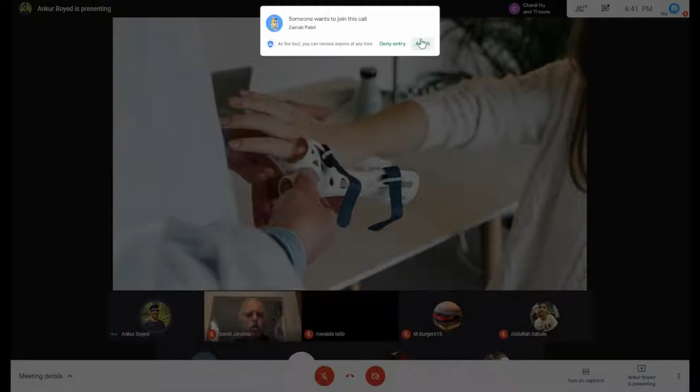However, these manufacturers only look for money, so they don't like to take risks with ideas that are new and innovative. This means that if you have a world-changing idea and a plan on how to make it, you're very unlikely to have it spread throughout the world. However, in the past couple of years, there have been many inventions and creations that bring privileges to the makers of this world, people like you.

Of these inventions, one of the biggest ones is 3D printing. It gives you the power to create pretty much almost any idea you have in your mind. To put it simply, a 3D printer works by melting plastic and creating a bunch of 2D layers that stack on top of each other to create a 3D object. Think about it as stacking differently shaped pieces of paper together.

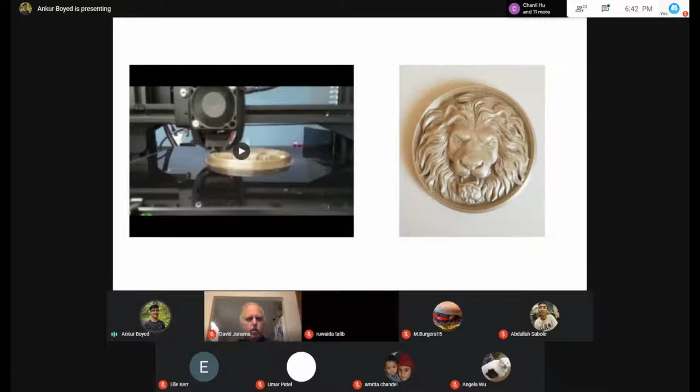For example, here is a lion emblem being 3D printed. Think about it as stacking differently shaped pieces of paper together. So this may seem really simple, but just think about it.

With a 3D printer, you can create pretty much any object you can think of, including desk organizers, headphone stands, miniatures, Christmas ornaments, or even drones. All of these things can be created without any interaction on your part. You just press a couple of buttons and the printer does the rest.

However, there is one really important skill you need to learn in order to do this, called computer-aided design, or CAD, which you'll be starting to learn today on a program called TinkerCAD. CAD allows you to create highly detailed parts on a computer, which allows it to be exactly replicated over and over again on different computers.

This means that someone on the other half of the world can take your design, print it, and get the same results as you did. This ability to give the same instructions each time is what makes 3D printing so useful.

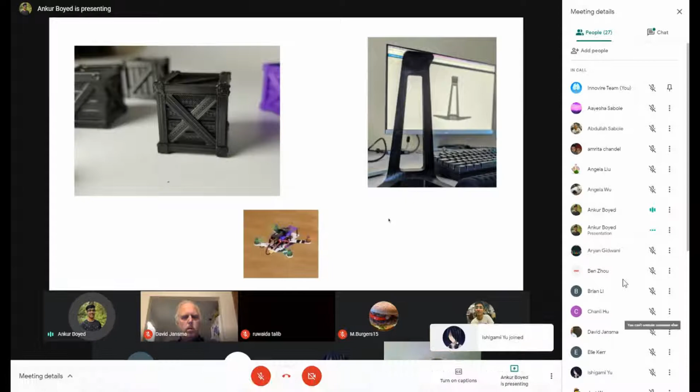If you've joined the Christmas CAD competition, you've been given the opportunity to 3D print your design for free. This is a really good opportunity to get into the field of 3D printing and learn how to create anything you want and go from an idea to a part that you can hold in your hands.

Now the question is, how can this technology solve the problem of mass manufacturing? Well, if you really do have a good idea for a device or product, you can start producing it using a 3D printer. If you want to perfect your idea, you can produce it using a 3D printer. Companies all around the world use farms, or many 3D printers, to create their products.

There are so many applications to this really cool technology, and we hope this small workshop can help you get into it. Thank you.

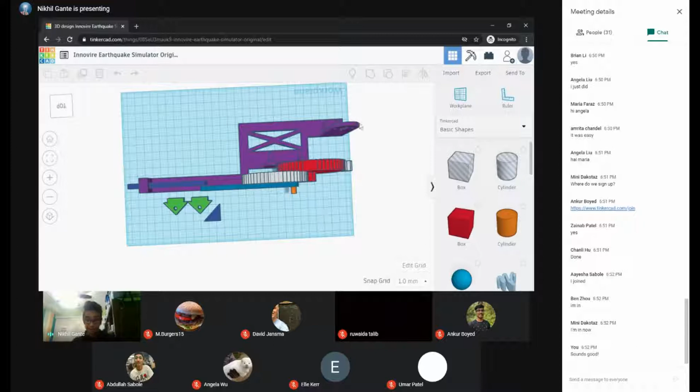So I don't have the tricopter on hand, but I do have some other projects. This is something I worked on last year. If you don't know, Innovire hosts conferences in addition to just classes. We were going to host a conference this year, but then COVID hit, so that didn't really become a possibility. This is the Innovire earthquake simulator, a design that I made last year because at the time I couldn't access a Fusion license, they wouldn't respond to my emails.

I can see it. Yeah, a little picture. Yeah.

So this right here is, I think, an 8 to 56 gear. When you turn this gear, it starts spinning around. It's basically a rotary to linear converter, so when you start moving this, there's really no other position for this rod to move other than back and forth.

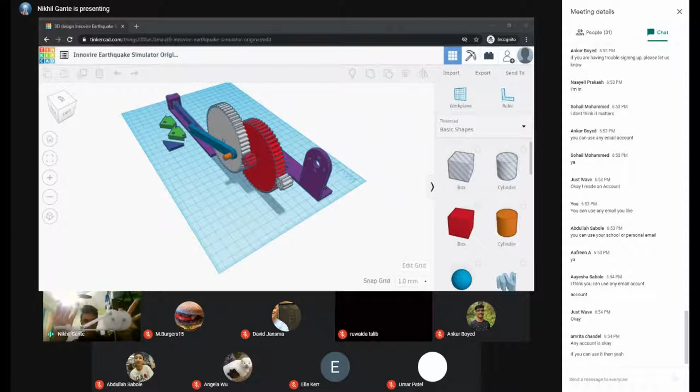So by moving this forward, the rod would start moving in and out. It's really hard to see on camera, at least I think it is, but when I start turning this it should start going in and out. I'll probably put my hand against it so there's some kind of background.

But this would start being activated in and out when I start spinning it, and this moving fast enough would shake a tower. So the goal of last year's challenge task was for kids to make a tower that would be placed on a platform, and this would be shaking that platform. Depending on how long the tower lasted, we would give a higher score.

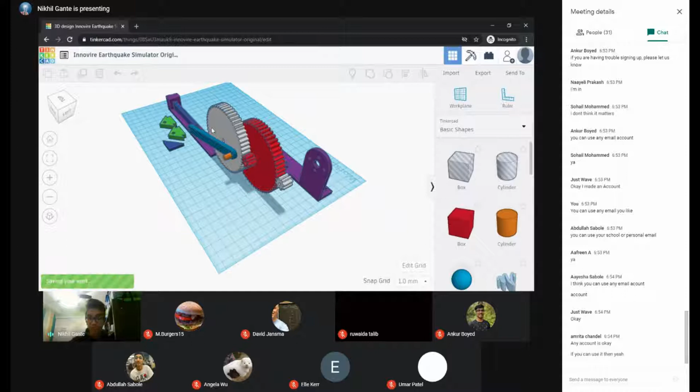Anyways, that's just one of the projects I've worked on in TinkerCAD. There's a ton more. I would just keep talking, but I don't want to waste your time. So if everybody has a TinkerCAD account, I can just get started.

You have one? Yeah, I'm just gonna start now. But you can see all the different projects I've made, and I'll go over some of them afterwards too if we have time.

So we can just go ahead and go to create a new design, and you have to be under 3D designs, because TinkerCAD also allows you to create circuits. Those are also pretty useful - I created a quick voltage divider last month. But you want to stay in 3D designs, that's what we'll be looking at today. So just click new design and we can get started.

So I'll just be teaching you some of the basic parts of working with TinkerCAD, and then we'll actually look at making a project together. So let's look at the controls first of all.

If you guys have a mouse, which I recommend for any CAD modeling software, you just need to hold down the right mouse button for activating the rotate function like this, and then you can look all around your design. Or if you're working on a trackpad, TinkerCAD supports that as well - you can just hit your right trackpad button. It's pretty easy. And if you hold down your scroll wheel on a mouse, you can pan in and out. The equivalent on a trackpad is holding down the shift key while right mouse clicking.

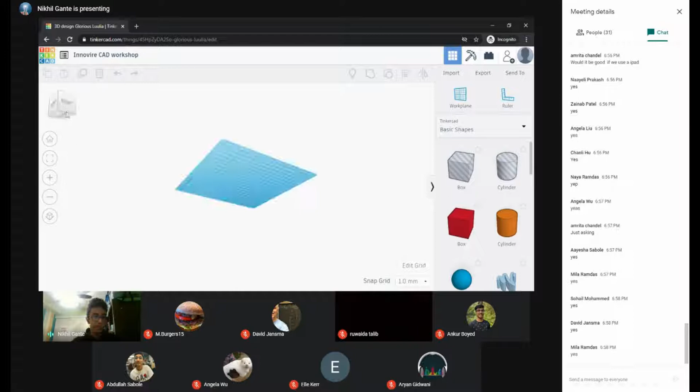You can also use the view cube to rotate around, though I don't prefer that since there's not much resolution compared to rotating with the right mouse button. I can click the front view to show exactly a front view, and I can click not only on the main faces but also on a corner or an edge.

Anyway, that's enough about how to work around the TinkerCAD workspace. Let's actually try to build something.

On the right side you'll notice a bunch of icons, and one of these is the TinkerCAD shape selector. This classifies which kind of shape you want to use. You have basic shapes like boxes, cylinders, and spheres, all of which you might have worked with in geometry in math class.

If you select a more complex array of shapes, you can go to text and numbers, connectors—these are also pretty cool—and there's also some circuit assemblies, I think. No, that's not it. I really want to show components. Yeah, that's the one.

If you've ever worked with Arduinos or any kind of microcontroller, you might have worked with servos as well. These are all part of the TinkerCAD workspace, so you can actually import them into the model and work with them. I think it's pretty neat that they have these already built in, because I know I would have loved access to these when working on a project.

For the most part, the shapes we're going to be looking at are in this basic shapes tab.

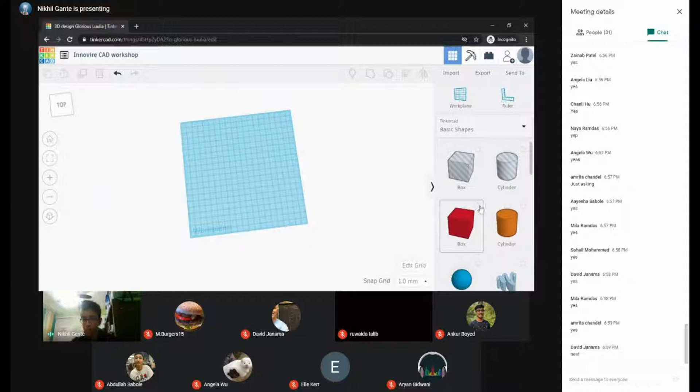You can actually select favorites for these shapes. I'm not sure if you can see the little star icon, but if I click on that, it becomes a favorite and I'll be able to access it more easily. So instead of going through shapes, I can go to favorites, and this is now a favorite—the box is inside my favorites.

I'm going to use this a lot, so I can drag the box shape right into TinkerCAD, like that. It's really as simple as that.

You can select all the different parameters you want here, including dimensions. For example, this is a 20 by 20 by 20 cube. I can make this 35, and just like that the cube expands outward. I can make this 10, and it will start shrinking. It's really easy to work with, as you notice.

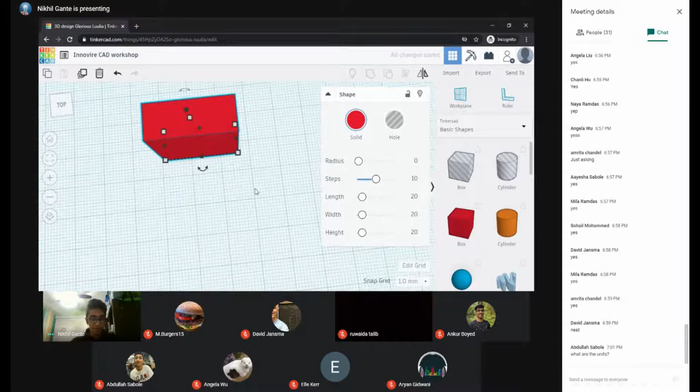I can also grab the little black box to expand it without having to type in a number. Now, a difference between TinkerCAD and a much more advanced parametric modeling software like Fusion, if I were to just show over here—

Wait, can you guys see tabs that are not my TinkerCAD? Oh, no, we can't. Okay, I should probably change that. Okay, I have to stop presenting.

Also, in the meantime, while you're waiting, Abdullah asked what are the units in regards to TinkerCAD. What do you mean—like measurement units? Yeah, I think that's what he meant. Okay.

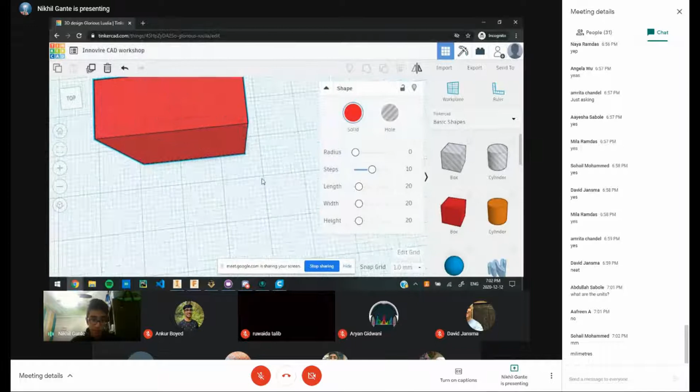The measurement units by default are millimeters. Let me get over to TinkerCAD. As you can see, if you look at the grid over here, that actually measures in millimeters squared. So that's 1 millimeter, 2 millimeters, and each of these larger squares are square centimeters. It's pretty neat that they make it easily accessible for you.

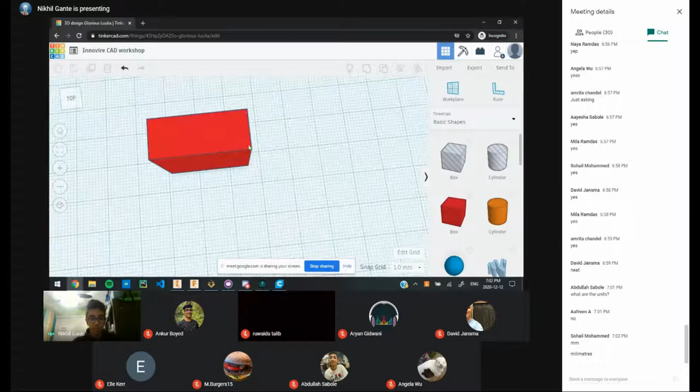But if I were to go into a parametric modeling environment like Fusion, it automatically allows me to set these dimensions and always shows them. If I switch back to TinkerCAD and look at a shape, I don't readily know its dimensions—I'd have to click on it and select to find out. You can't add dimensions to objects otherwise, so that is one downside. But again, this is simplistic, meant to get people into the hobby of 3D printing.

Some of the other shapes you can work with are also down here, and a useful feature is grouping shapes together. For example, I could take the cylinder and place it over here.

I can now group these two together. Right now they're separate objects, so if I start dragging this around, the red block is completely independent. But if I were to group them together, even if they're not attached physically, they'll become basically one entity, so now you can see they're both red to signify that. And now if I move them around, they both move together.

You can also degroup these shapes. You would press Control G to group stuff, or by pressing the icon. You press Control Shift G to degroup it. So if I do that, now these two are their own separate entities again.

Does the grouping concept make sense to everyone? It's not something that you see a lot in other softwares.

How do we do it again? Okay, how do we do what again? Like making the shape? Oh, grouping. Oh, grouping, okay.

So for grouping, you just need to select the shapes you want to be grouped, and that's signified by a rectangle with dotted lines. You can make sure you've selected the right shapes because there will be a little blue outline over them. And you just press Control G or the group button. Does that help?

More versatile than SketchUp. Yes, I agree.

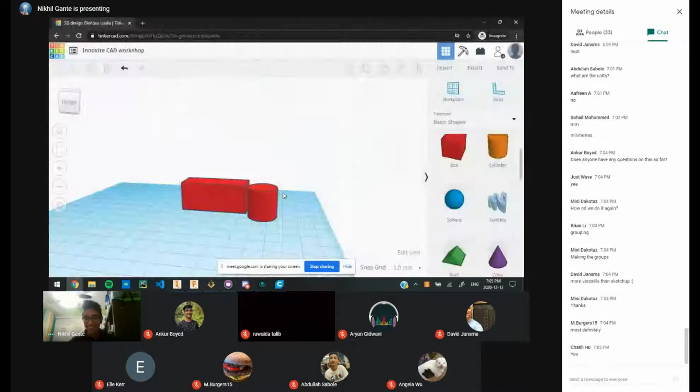So we can now move these together. We just made a positive shape, a positive group. Now these two are together, they're linked. But what if we want to make a negative space, like a hole?

Let's say we had to put a screw in. So if I were to make a screw, first I'm going to have to degroup these two objects, like so. And then I would make the dimensions for the screw hole. Let's say it's a 3mm screw, so I would just make it 3 by 3.

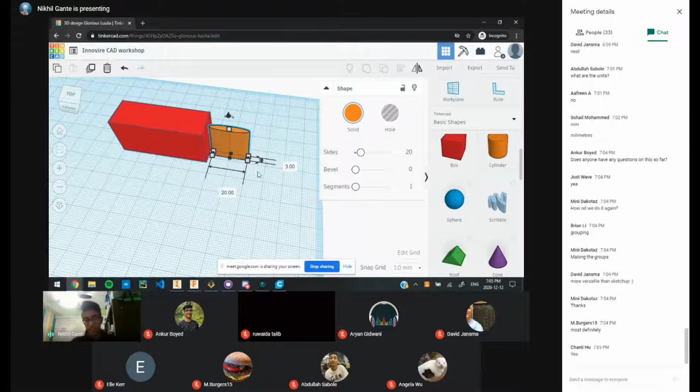Even though this says it's a cylinder, it allows me to make it like an elliptical object—I forgot the actual name for the 3D shape—but even though it says cylinder, I can squash it down and it becomes flat like that. And if I make it 3 for the other dimension, you get a cylinder again, but now with a smaller radius.

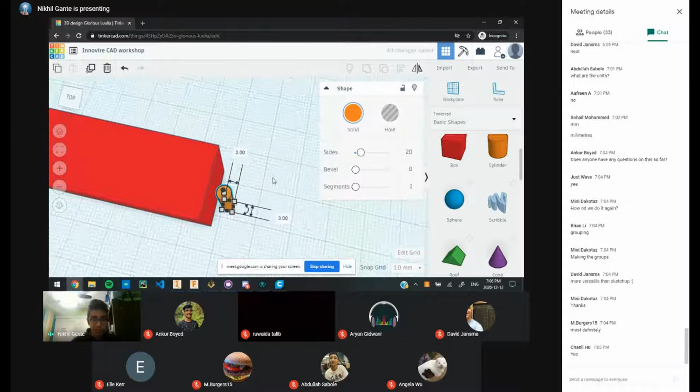You can see that these two are actually perfectly level, and I can confirm that because this is 20 millimeters, and this is also 20 millimeters. So if I place this right inside of the red box, you can sort of see the circle traced onto the red box.

So that cylinder you can click on, and then you can make this a hole. If you look over here, you see two different options: a solid object and a hole object. This is positive space, meaning these two get added together, and this is negative space, meaning this object is being subtracted from the larger one. I know I just said a bunch of words there—let me actually show you what that means.

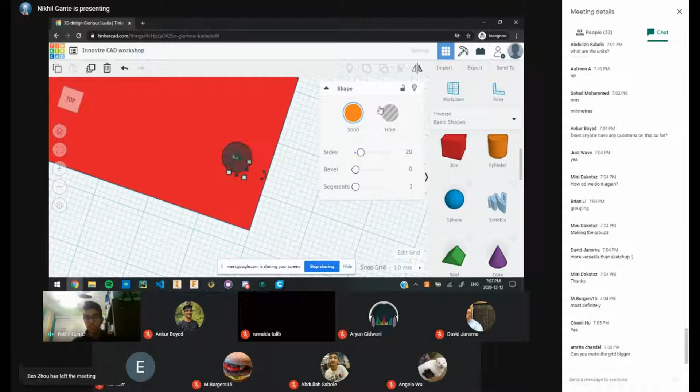If I press hole, you can see it becomes transparent. It's trying to simulate what it would look like if there was an empty cavity over there. To make sure these two will now actually become a hole, I need to select both of them, like I did before, and just press group. When you do that, you get a beautiful hole placed in the middle of it.

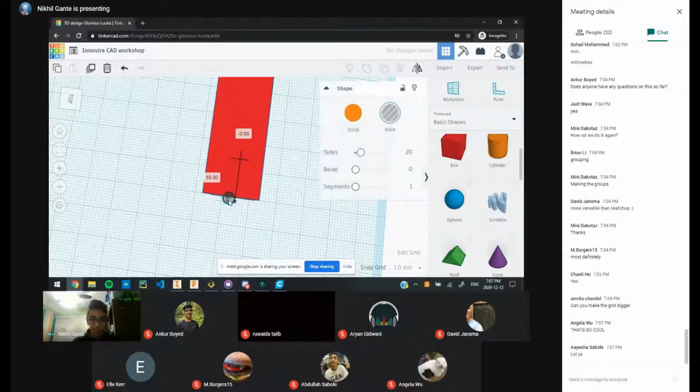Another difficult thing you have to deal with in more simplistic softwares is you can't actually tell if this is centered or not. This can be pretty annoying because there are two ways of moving these objects. The first way is to move it around with your mouse, but that's not extremely precise.

Instead what you would rather do is press the arrow keys. I want everybody at home to try pressing their arrow keys and moving it up and down, left and right. You can pretty much move these around however you like, and it allows a lot more precision than me manually trying to aim with my mouse.

Nikhil, go ahead. Sorry to interrupt, but someone in the chat asked, can you make the grid bigger? Can I or can he? Like, is it possible? How do you increase the size of the grid?

Oh okay, so you just need to go into edit grid, and then instead of the width and length being the default, which is 20 centimeters by 20 centimeters, you could make this, I don't know, 450 by 450. And it doesn't have to be square, obviously.

You can make it whatever dimensions you want.

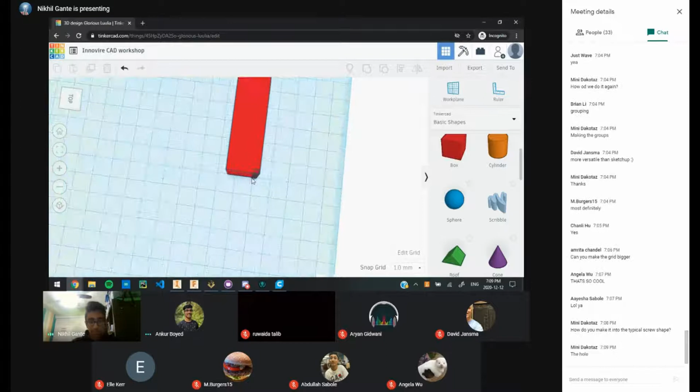Someone asked, how do you make it into the typical screw shape, like the cylindrical hole you just made? I think he's asking how you make that into the typical screw shape, like with threads. If you can unmute yourself and clarify your question, that would help, since talking through chat is fairly slow.

He said he's not able to talk. So, are you able to make a threaded screw or something through TinkerCAD? You can't do it directly, unfortunately. The only way I can think of is to import a helix and bind it around the cylinder, but that gets pretty complex. It's much better to import a design someone else has already made. I'm sure you could find something.

The great thing about TinkerCAD is that it's not just software for designing things. Unlike other software, and this is an advantage, you can actually search for other people's designs using the search icon. So if I wanted to look for a threaded screw, I can pretty easily try that. I didn't think I'd find anything, and yeah, nothing there.

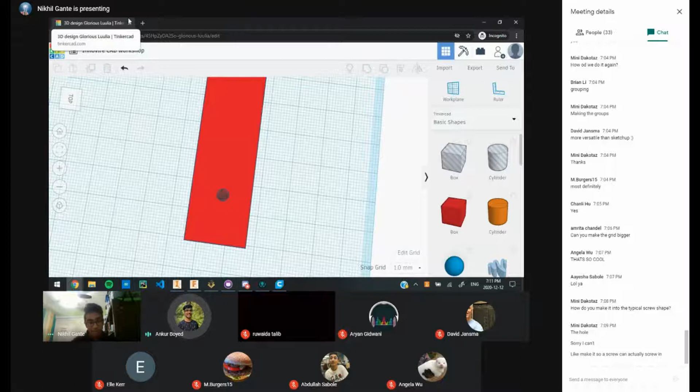Yeah, sure. Thingiverse is an online community with a bunch of 3D printed objects, but instead of being specific to TinkerCAD, it's across all CAD software. It gives you a 3D printable file, and by the way, these files are called STLs. So here we can see a bunch of designs on Thingiverse.

Actually, this is a YouTuber I watch, named Tom Stanton, and he made this air engine and put it up on Thingiverse. If you wanted to download his files, it's extremely easy - you just press download all files, and it downloads a zip file. Then you can import that into TinkerCAD. Let me show you that process, since it might be useful for you guys.

Do you want to do a thread, like how one of the students asked? Oh yeah, sure, I can do that.

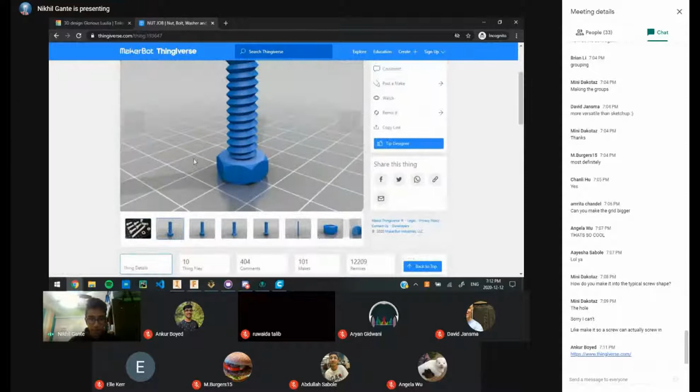So each of these files is a screw. It looks about right, so I just press download all files, and I need to unzip them. Okay, it's taking a while - I'll continue the lesson while that's opening up. Okay, that didn't take as long as I expected.

Okay, so you guys can see other windows, right? I changed the settings - yeah, we can see it now. Okay, cool. So this is in my downloads directory as the nutjob washer folder, and we can just go into the files folder, where each file there will be an STL.

So let's say I wanted to keep this one - I can easily do that. I just need to get that. So I'd go into the TinkerCAD file I'd be working in, and here you can see the import, export, and send to files icons. You just click on the import icon, and then you can either import an STL, OBJ, or SVG file.

OBJ is another format for 3D printable objects, but you won't end up using it often. SVGs are used for laser cutting - in fact, when Ankur and I made the tricopter a couple years ago, we used SVGs because we needed to laser cut files. If you don't know about laser cutting, it's a pretty cool thing, you should probably check that out.

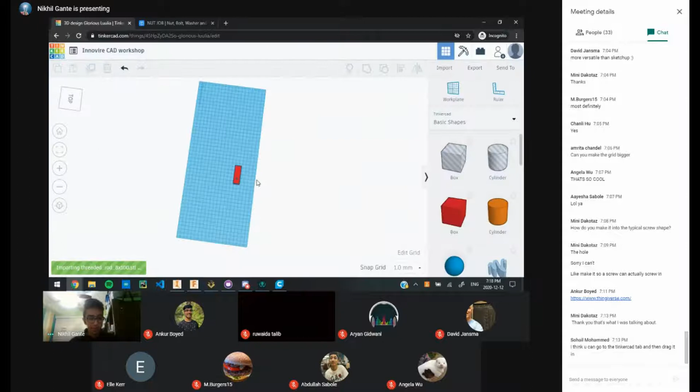And I can go into files, and let's say I want to go and grab... I forgot what it's called. Threaded rod, okay, yeah, this. And over here it gives me all kinds of dimensions: length, width, and height. And I can actually scale it up or down. So this will start off with the default measurements that the person made it with. If I want to make it twice as big, I just need to make it 200 instead of 100. Pretty self-explanatory, so I can import the STL in there.

Okay, so I just made a 200% size screw, and you can see the threaded rod in there. Can everybody see that? It is huge. Everybody can see that, right?

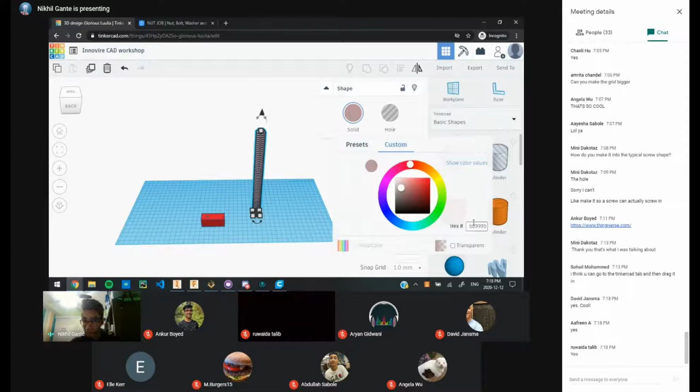Yep, okay cool, so I can change the color of this. Another cool feature, you just need to go into solid and select the color you want. And you can even make your own custom color by selecting the color wheel. All the stuff, if you guys just play around with TinkerCAD, I don't think you'll have much difficulty figuring it out on your own. It's not a particularly challenging software to work with. So let me make this green.

And if I want to actually thread into a shape like someone suggested earlier, it's not very difficult to do. All you need to do is make this a hole, which makes this negative space. Remember that. And now I can make this larger to accommodate the screw. And now when I select these two features, I can group them together, and there should be a thread right there. So unlike just a cylinder, there's actually a helix being drawn on the inside of this. So if I were to zoom in over there, you can see the spiral.

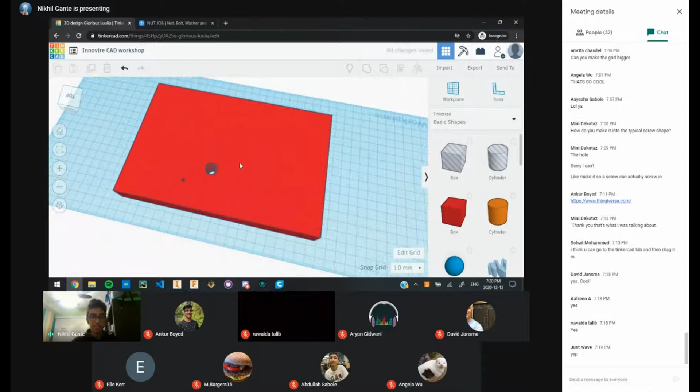Can everybody see how there's a spiral there? This is as far as I can zoom in, unfortunately. Nikhil, that'll print out with the spiral in it? Yeah, so with 3D printing, the resolution is only going to work so well. So if the thread is too small, which in this case I suspect it is, your 3D printer will probably have a pretty difficult time giving you those exact dimensions. It'll probably be like a much lower resolution version of this. So for making any threads, 3D printing I would not recommend using. You should probably use some other kind of machining, like if you guys know what a CNC machine is, that is much more precise than a 3D printer. So I would recommend using that for some kind of threading. But 3D printing is suitable for most kinds of shapes.

Another thing we have to talk about is also... Mr. Jansma, sorry for interrupting Nikhil, but I just want to answer your question. So when you're asking about threads, I do have a 3D printer at home, I have access to one, and I have been able to 3D print threads pretty successfully. But the thing is, like Nikhil said, there's only a certain amount of resolution. But what you can do is let's see if I can... Can you guys see me?

Yeah, we can see. Okay. Okay, cool. So let's see. Okay, yeah, wait one second. Okay, yeah, so you have this.

This is basically just like a wire organizer I 3D printed. I printed a thread here, and you can see that it works pretty well. This is an example of something that's really useful you can do with 3D printing—you can make custom threads and that kind of stuff.

But there are some constraints you need to think about. With TinkerCAD, there's a set resolution that you can export your file at. But if you're using a more complex design software, you can get a better resolution, and it's able to print really well.

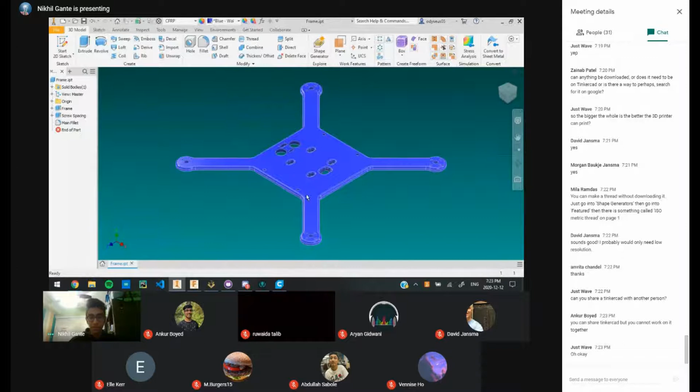Here's what the original file looked like—this is the quadcopter frame in Autodesk Inventor. Because I exported it as an STL, I could import it in here. So if I went to the first page, I don't have it here at the moment, I left it right here. As you can see, when I imported it in TinkerCAD, I was able to do so successfully, but it does really take away from the resolution.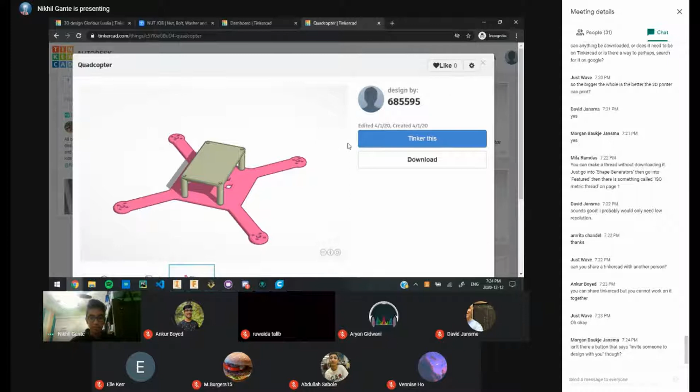You can see the edges are pretty roughed up, and you will lose some resolution in the 3D printing process itself. So when you design something, you can't always expect that when you actually make it, it'll be 100% the same in real life—that's something you have to account for when you design a part. For example, whenever I make a hole, I always design it with a quarter millimeter larger diameter than I actually want, just so that when I start fitting things in, it doesn't cause a lot of internal friction. That's just one example I can think of.

Sorry for rambling again. What was the other question? I forgot.

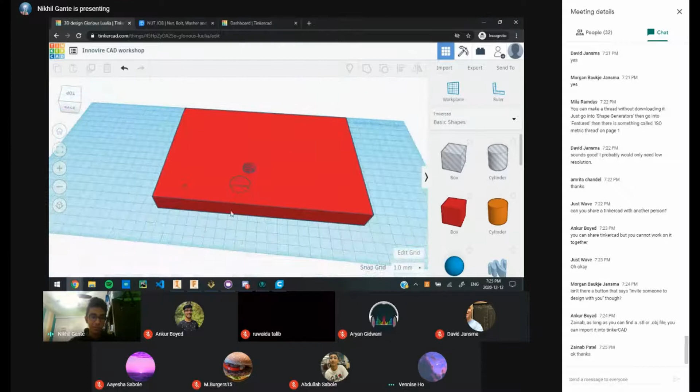I don't know if you covered this already, but another person was asking if the bigger the hole, is it better for the 3D printer to print? Not necessarily—unless you have an extremely small hole that you need to print out, like under 0.5 millimeters, I wouldn't assume it has any trouble.

But again, ask Ankur for more about that. He actually has a 3D printer.

Sorry, he or she asked how small, or can you print holes? I remember she said the larger you make the hole, is it easier to print? That's the case to a certain extent. If the hole is less than 2 millimeters, it'll have a harder time printing. But after that, it doesn't really matter that much. You can go pretty much as large as you want, and it'll still be fine.

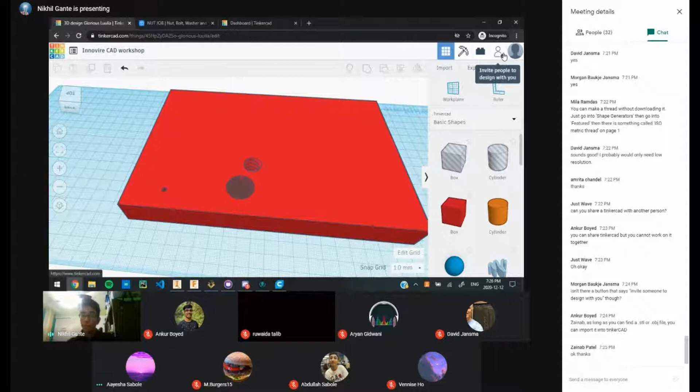The current last question is whether or not you can invite someone to design with you, or if there's a button to do that. When I checked last, there wasn't, but they've now added that feature. You can click on this icon and generate a link to share with the person you want to design with. Let's try a little experiment.

I copied over the link. I want to see if you guys can actually pop in and design with me. For the sake of not killing my computer, could it only be the execs who join in from Innovire? I don't want too many people joining in. Just tell me if you're able to.

I am joining, one second. Okay cool, I'm moving stuff. Can you see it? Guys, can you see that? I'm not touching a single button. He's able to collaborate. It is slightly laggy, but you can collaborate is the short answer.

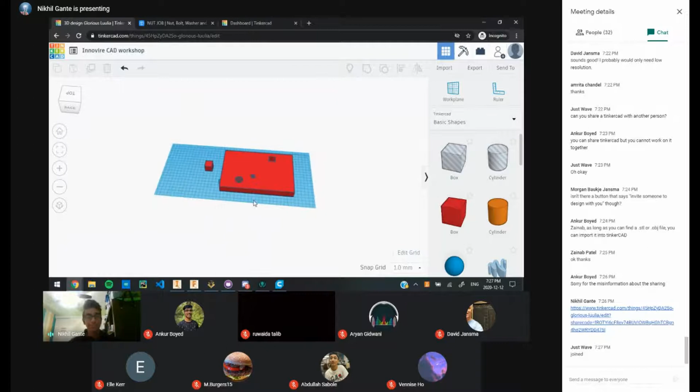Does everything I've said so far make sense to you guys, or am I just rambling? The chat says yes. Yes as in I'm rambling, or yes as in I make sense? Yes, as in it makes sense, I think.

There is a question: how do you know how many people are online with you? I think that's regarding the sharing. If I'm being fully honest, when I used TinkerCAD last, this feature wasn't there. When I just checked it now, it does not tell you how many other people are there. You'd expect that, as with Google Docs, the icon of the person joining would appear. But there was no way I could tell Ankur was editing mine until he started moving things around, like he is right now. It's unfortunate, but you can collaborate on the same design, you just won't know who is collaborating, if they're collaborating, and if so, how many people there are. But it is there, to answer your question.

Is that all the questions? Am I up to date, or am I still missing a few? You are up to date.

Okay, amazing. So we've discussed a couple of things. We've discussed how to bring basic shapes into TinkerCAD, how to combine shapes using the group function, and then how to actually subtract from those shapes with a hole or negative space.

Now let's actually try applying that into a project. The thing I want to create, I want to make a cool project. I've never actually made this before, so this is complete improv. I'm going to search for a batarang, and let's look for the design, and try to design a batarang.

I think that'd be a pretty cool project, and if you guys want, you can download this file afterwards too. I'm sure someone else has designed this on TinkerCAD before, so I could just copy theirs, but I actually want to show you everything we've worked with and see it applied in a project. I think that would be much more interesting to you guys.

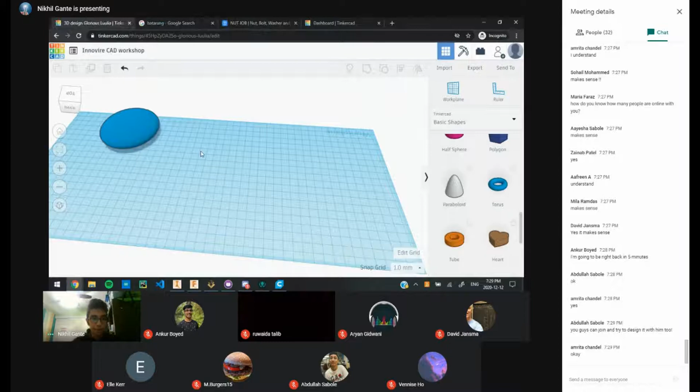For now, I'm going to assume that this batarang needs to be fairly thin, so let's say 2 millimeters. 2 millimeters for hardened steel is going to be extremely rigid, there's probably going to be no flex. So that's the reason we can make it so thin.

Okay, I'm going to start off by getting the main shape I want over here. It's been a while since I've thought the way I need to think in TinkerCAD, because the process is very different from other CAD software. First I need to make a cube that's going to represent what the bat is going to look like, and then I need to subtract from that shape in order to get a batarang.

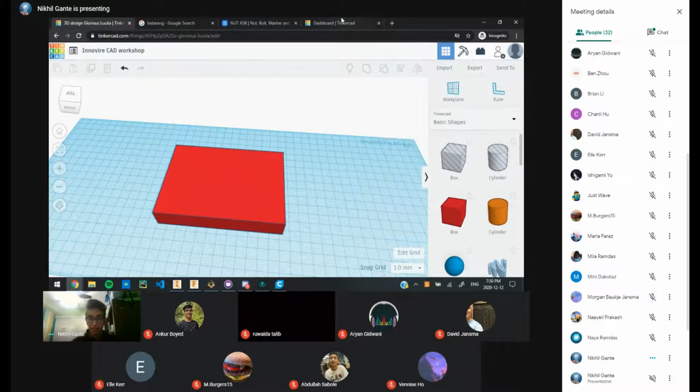And guys, I'm going to be completely eyeballing this. This is not based on any actual measurements, but the point of this is just to show you the power of TinkerCAD. Although it is basic, like I've said before, you can do quite a bit with it.

So when you import a cylinder, you'll notice by default it has 20 sides. If you look at it, it's not actually a cylinder, it's really a polygon with 20 different sides. To get more resolution, so it actually looks more like a cylinder, you push this dial all the way from 20 to 64, which is the max resolution TinkerCAD supports.

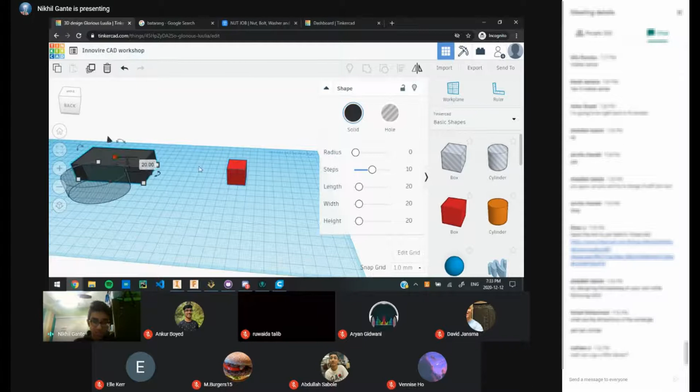Okay, so what I just did is I took a box and kept the height of the box the same. If we look at it, this is 20 millimeters, and this is also 20 millimeters. But then these dimensions are different, the X and Y. So I changed this to 40, and I made this 80. I just created an 80 by 40 by 20 cube is all I did.

Just for anyone who's a little behind, that's all I did. So try copying that on your own, and then we'll move on.

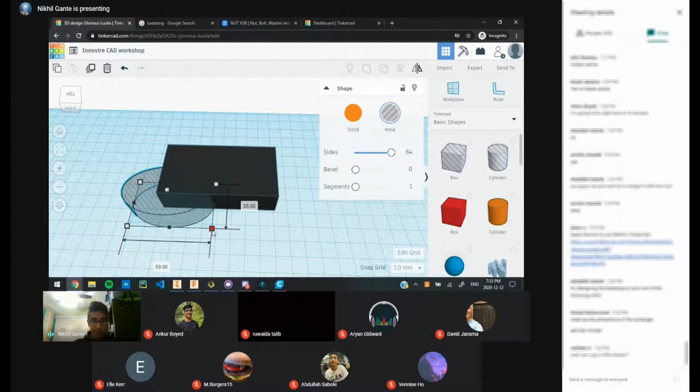So I'm not sure if I'll actually have the time to finish this design by today, but if we don't, that's not a huge deal. I just want to show you how to work with it.

Try just doing half, because then they can do the other half on the other side since it's symmetrical. Yeah sure, okay, that's actually a good idea. So once I design it on one side, I'm going to copy it over.

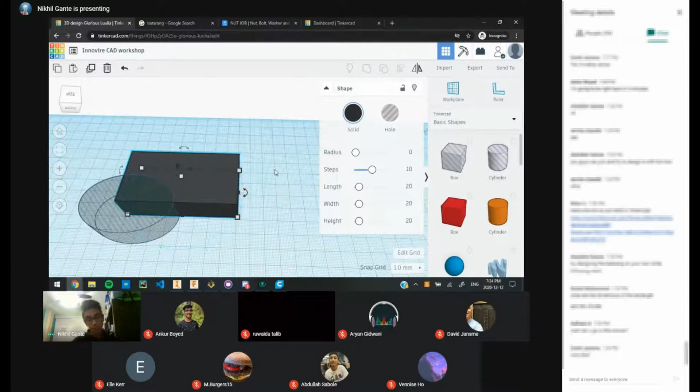By the way, I don't think I told you guys this. When you press Control C and Control V, it will copy the shape as you'd expect. But you can also copy multiple shapes. So if I were to select something like this and Control C, Control V, it's going to copy both of them. But as you'll notice, they're also not grouped, so it still preserves the properties of the shapes even though they're being copied over. Yeah, Vennise, that's a good idea.

I'll start by making one side. So because I'm only making one side, I'm going to reduce this dimension in half. Instead of 80 by 40, I'll make this 40 by 40.

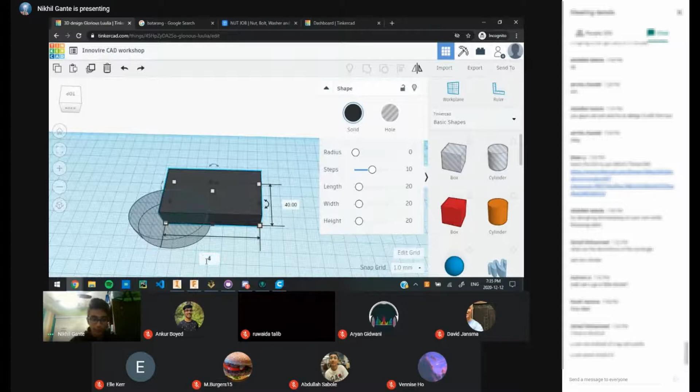And now I need to create this curve. And guys, I'm completely eyeballing this, there's no dimensions to this, this is purely for the sake of example. If I were to actually design a part, this is not how I would go about it. I just want to make that clear. Most designs actually have the design process in mind.

You'll notice that this curve has a constant radius throughout, which tells me that the center of the circle is hitting both of these points, which is going to help me make this much easier. So now the center of the circle is hitting the corner of this, and I just need to check if I need to make it any smaller. Looks like I do.

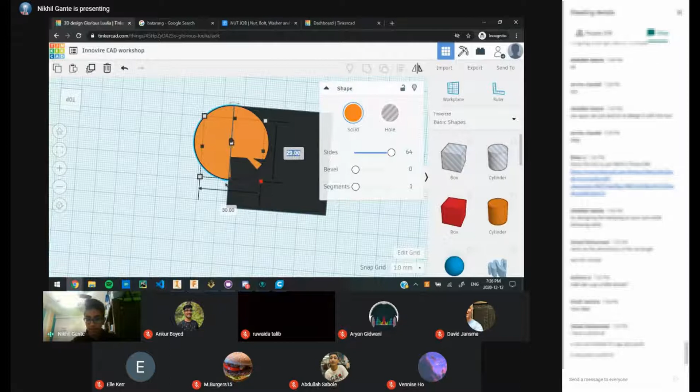So instead of 30 by 30, let's make this 25 by 25. Am I still going too fast? I can slow down if need be, just type in chat.

Another feature we need to talk about is the snap grid resolution. When I move things with my arrow key, it moves in 1 millimeter increments because the snap grid is set to 1 millimeter. But if I need to move at a smaller increment, like 0.5 or 0.25 millimeters, I can go to snap grid and select the interval I want. So I'll click 0.5 and move it over like so.

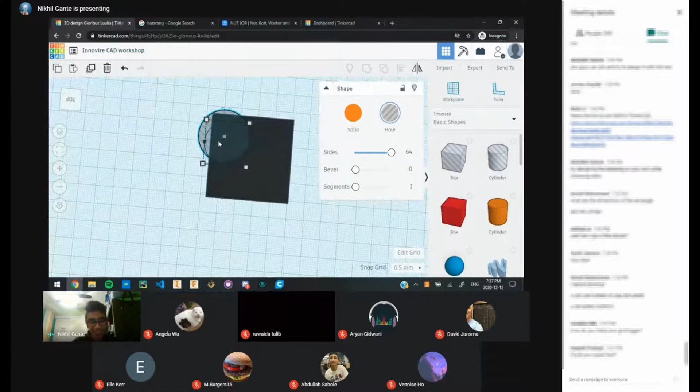That looks about right. Wait, no, it doesn't. This is supposed to be at the center. The reason I switched it to 0.5 is if you look at this number, it's an odd number, and if I want the middle of that, which is 12.5, there's no way I can position it without using this. I hope that makes sense.

Someone asked if we could show how to make the grid bigger. The grid or the snap? I think you just need to go into edit grid and select the dimensions you want over here. Is that helpful?

She said yes. Okay, happy to help.

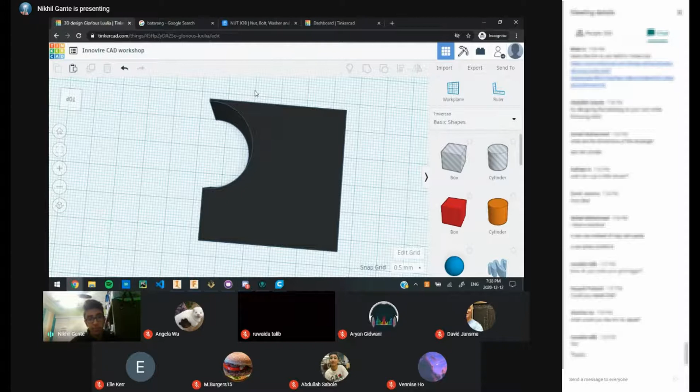So I've made one curve over here, and I can group this together like that, but it's usually not a good thing to do because if I need to make a change, I'd have to undo a bunch of times to get this back again. Instead, it's much preferable to keep it ungrouped for now, and once I've drawn all the different curves, then group it all together.

I'm going to draw in another cylinder for the second curve, and make all sides 64. I need to simulate this. If you look at this, it doesn't have a constant radius all the way throughout, so I need to make this an ellipse rather than a circle. I can change that by adjusting the X measurement, and I also need to change the Y a little bit.

Oh, this is going to be half the shape, so I need to keep that in mind. I only want to take into account the left side of this shape because I'm going to be copying everything over. I'm glad Vennise gave me that idea because it's going to save me half the work rather than redoing it.

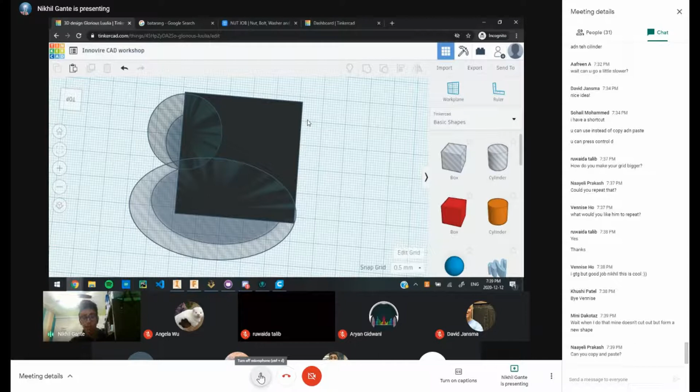Yes. When they do what? It cuts out. Okay, if you guys can, could you share your screen? I'm not sure what is causing it, maybe it's your method or it's the software, but I would probably say it's the method. I can help with that if you guys share your screen.

So what you need to understand is when I put in shapes here, they're all free moving. Nothing is set into stone yet until I actually group something. So when I group things together, then things are fixed. When I select everything and press group, now I've made a hole. Does that answer your question?

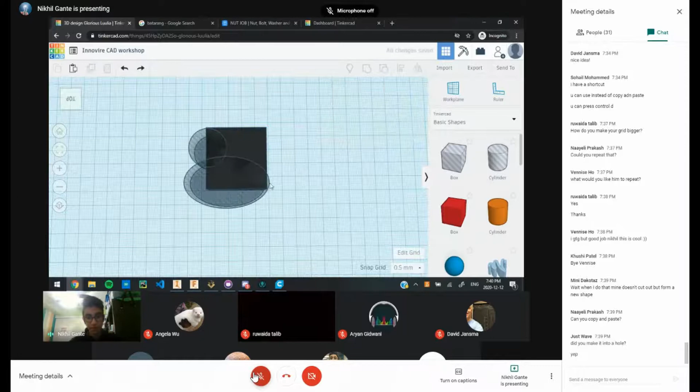I'm going to move this back over to 1 millimeter, because if you notice, when you move by a smaller increment, your shape moves slower. Just to demonstrate that, let me exaggerate this. I'm going to change the increment to 5.0 millimeters, and when I move this, it's going to be super fast. See that? I can move across the screen fairly easily.

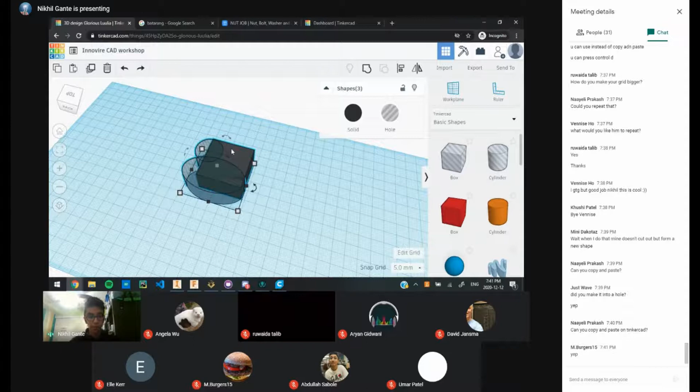But if I were to change this - oh sorry, go ahead. As I said earlier, if you select the shapes you want, you can't right click, you press Control C, Control V, and it copies it over for you.

Oh this? I'm not done making this yet, I need to see if it'll work out, then I'll tell you what those are. So I'll go over all the dimensions again so far. This big cube over here is 20 by 20 by 20. Actually, I should probably be writing all this down, so I'll just make a Google Doc or something where you guys can copy it over.

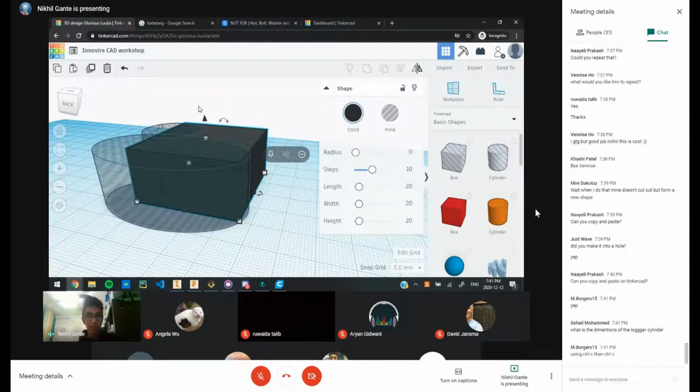Or actually, Andrew, could you make something and share it with me so I can just access it that way? Oh actually no, that's not a good idea. What am I saying, there's no benefit.

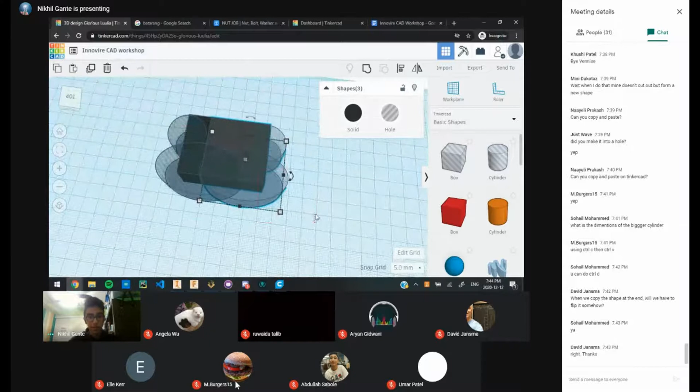So the final batarang, when I finish it, what I'll have to do is copy it and then invert it like this. It doesn't look right now because I haven't actually grouped anything, but you need to rotate everything afterwards because you're doing a mirror, not just copying it.

I need to go into my personal account.

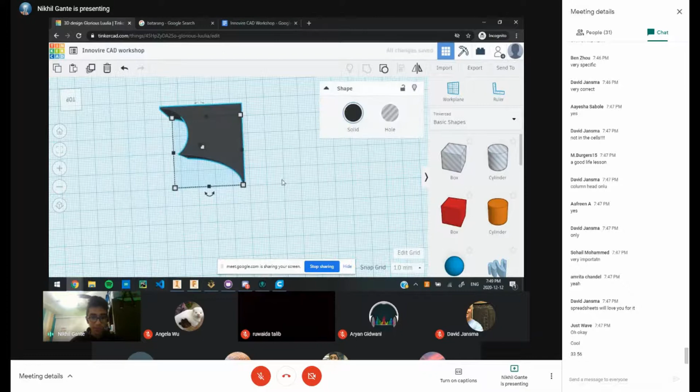So I'll keep it the same, I don't want to overcomplicate this. If I were to group this together at this point, you can see it sort of looks like half a batarang. It looks fairly narrow, but if I were to expand this out, it looks more and more like a batarang. I can fix that later, not a huge deal. So I need to figure out the dimensions of this, my bad.

If you ever make a mistake, you can just Control-Z out of it. What you don't want to do is click the TinkerCAD button or go back, because it will save your changes but not your edits, if that makes sense. It won't show your previous edits. So if you need to make changes, stay in the browser. Unfortunately, there's no way of going back.

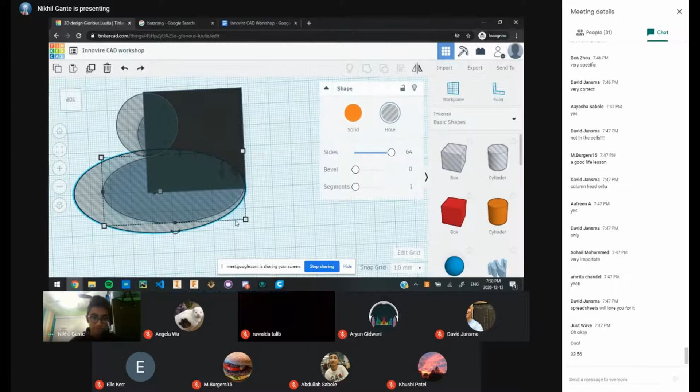Is that all the features I need on this? Oh, I need to add this little head over here. So I need to add yet another cylinder. But before I do, I'll give you the dimensions of the larger one: 70 by 33. I'll make this 80 because the center of the cylinder isn't contacting this line over here. So 33 by 80.

Okay, so that's pretty much everything for the wing side of things. Now I need to add the features for this head, and it's not too difficult to do. I just need to import another cylinder, set the sides to 64 - remember, you want that resolution - and pop that in over here. And it's going to give me that kind of shape.

I do need a slightly smaller radius, if I'm correct. The dimensions don't look proportionate otherwise. So I'll make this 15 by 15. That looks more accurate.

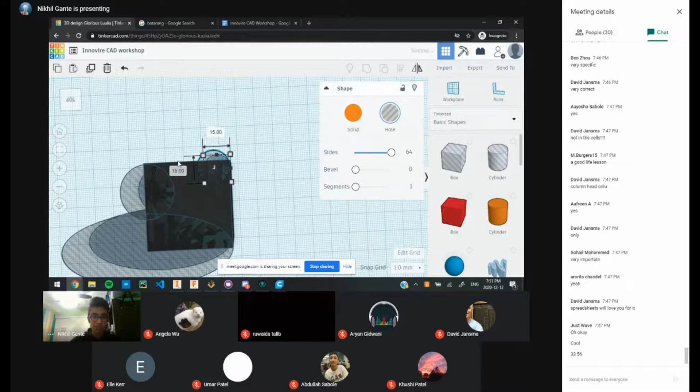And like I said, there's really no way of telling whether you've centered something other than looking at the grid, and that's not perfectly accurate either. It's like measuring something under a millimeter with a ruler - it's hard to do. But if I look at it, you can tell it's centered. Actually, is it? I need to make sure. So the way I would tell if it's centered is if the distance between this line and the edge of the circle, and this line and the edge on this side, are the same - then these two must be centered. So I can just quickly count that.

That's 1, 2, 3, 4, 5, 6, 7. And this is a 15 millimeter circle, so 15 divided by 2 would give you 7.5. So this distance actually needs to be half a millimeter to the right. So I can go over here, change the snap grid settings to 0.5, and move this over half a millimeter. And if I were to measure it out now, you can see there's half a millimeter taken up by this cylinder. And I'll change this back to 1 millimeter.

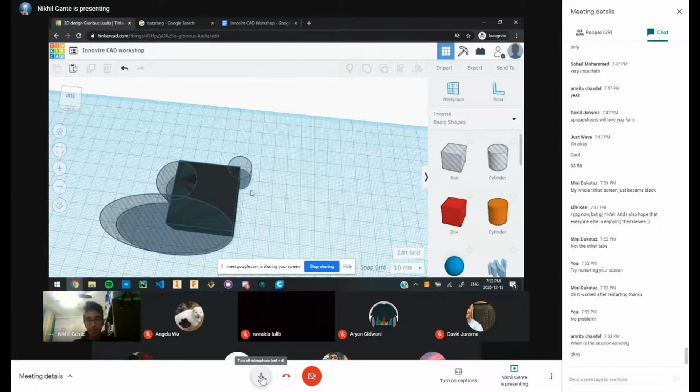Okay, so now these two axes are centered in the circle - they're both touching the center of that circle, if you can see. And I won't actually be going through drawing the head because that's a much more time-consuming feature. You'd actually need to create a wedge for this, and then a circle for the head. It's a much more complex shape that would take a lot more time to do.

For this, let's just look at a headless batarang for now. So if I were to copy that over - I can copy this. So what I just did is I selected the shape, pressed Control-C, Control-V, and now this is shifted over some distance. And to actually mirror something, you're going to need to use the rotate tool.

So all this while we've been moving it around like that - that's translation. We've been expanding it - that's called dilation. And then now we need to rotate it. So we want to rotate it along the y-axis in order to mirror it. So we just click on that and then rotate it 180 degrees.

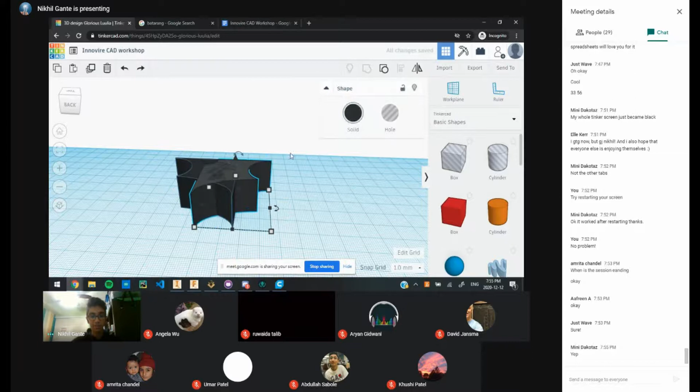Does that step kind of make sense to everyone? How we rotated it - you can select the exact amount you want. If anyone didn't understand that, I'd be glad to go over it again. We have yeses in the chat. Yeses to go over it, or yes they understood? They understood, okay.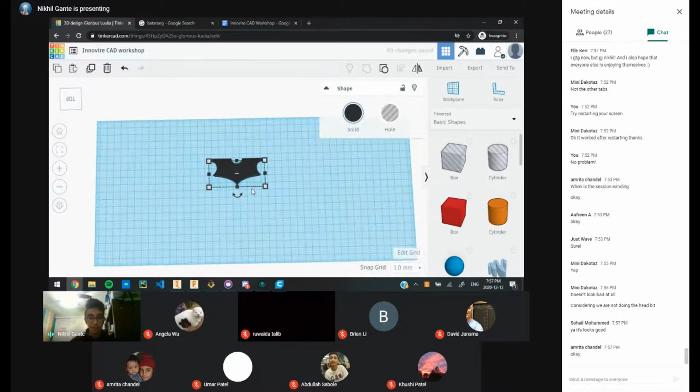Oh no, there's something else I wanted to discuss—that's why it was going to take until 8:05. I wanted to show you how this would look in the 3D printing process. Now, I don't have a 3D printer on me, but I can show you all the steps up to actually printing your part. So first thing we got to do is export this.

Actually, I want to make this 2 millimeters so it actually looks proportional. Everybody do that. Then I'm going to export this file. Previously we imported, meaning we brought in an STL. Now we can export this out as an STL, or you can export it as an OBJ or SVG file. An SVG, if you remember, is used for laser cutting—pretty cool process. But I just need an STL at this point.

So it downloads it for me right there, and I'll go into a slicing software. If you've worked with MakerBot 3D printers, you see them in schools all around—you'd use that particular software. But for all other printers, Cura is pretty much the industry standard, at least at the time I got it. I'm not sure if that's changed since then, but you can basically import your STL inside of this slicing software.

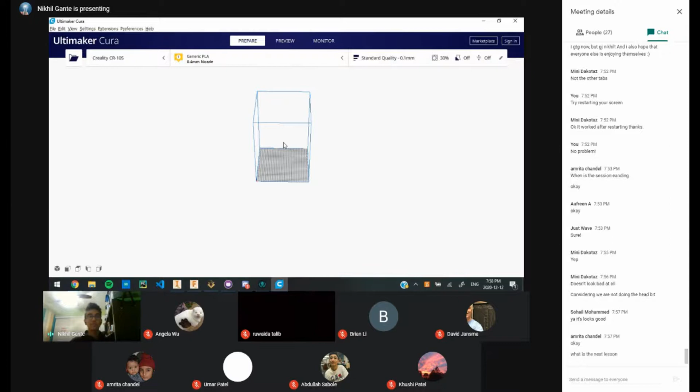What the slicing software does is prepare it for 3D printing, to put it simply. It takes in all the settings—for example, I'm going to be printing at a 0.1 millimeter layer height. Let me quickly explain what a 0.1 millimeter layer height is.

If you think about 3D printing, it prints in layers on top of each other. And the smaller you have those layers, the greater the resolution of that part.

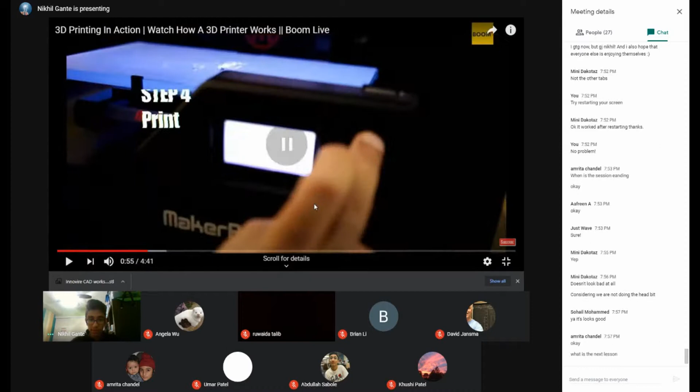So let me show you what that would actually look like. You guys can't hear it, can you? You guys hear it when it's playing? Okay, okay, that's not important.

I just need to show you that it's actually printing in layers. As you can see, I'd really want to get a side view. Okay, that's perfect—it's printing layer on top of layer, and the smaller you have those layer heights, the greater the resolution of your part. It's hard for me to show you that intuitively, because the camera resolution is too low for you guys to actually see the separation between the layers, but there's a bunch of other settings you can play with.

There's the material that you'll be using. The material we usually use in 3D printing is something called PLA, or polylactic acid. It's really good for 3D printing because it's cheap, lightweight, and melts at a fairly low temperature, but not so low that it would melt in the sun, for example.

So enough of me rambling, let me actually import something in. You click on this icon, and you can go into the directory where your TinkerCAD file showed up.

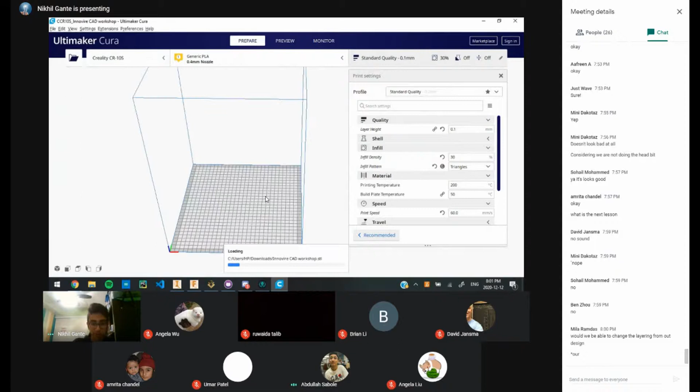So I'd go into downloads, click on Innovire CAD Workshop, double click on that, and then this should pop up on the print bed. There's a question that says, would we be able to change the layer from our design?

Okay guys, when I'm sending you the file, I won't be sending you any files at all. You guys will have to download it yourselves. When you download it from TinkerCAD, all you get is an STL file, which is a 3D printable file. I won't be giving you the result out of this process, I'll be giving you the result out of the TinkerCAD process. So all the settings I actually use for this print, that's a different file I'd be generating. The file that comes out of TinkerCAD is an STL.

The file that comes out of Ultimaker Cura is a G-code file. G-code is what's sent to your 3D printer to actually print your thing. So unless you want me to email you the exact settings for this, I'd much prefer to just give you this file, and you guys can figure out the settings on your own. This is more for a show because I don't actually know what settings I want, I'll just be explaining what those settings are for. So to answer your question, you won't be able to see the layer heights on your file because your file is an STL, and the file coming out of this is G-code.

Nikhil, can you hear me? Yeah, I can hear you. Sorry, just want to interrupt, I just came back from another meeting. If you hit preview, if you hit slice then preview, you can see the layers. Oh, they want to see it on this. Okay yeah sure, oh yeah that would. So yeah, if you press preview, you can see it being 3D printed, or a simulation of it at least.

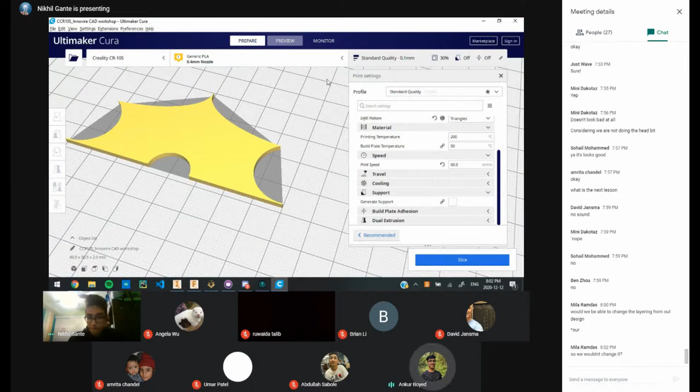Also, just another point, you don't have to worry about anything in Cura. All you need to do is just give us the STL file, and I'll handle the 3D printing. The service that's printing it will handle the settings that you can see here. Yeah, tuning the settings on a 3D printer, I'm sure Ankur can tell you it's a pretty long process. Yes, it is very long. You'll end up with a bunch of random issues like the print not sticking to the bed, or the filament not being extruded enough. You'll end up with strings across your print, a bunch of nasty stuff like that.

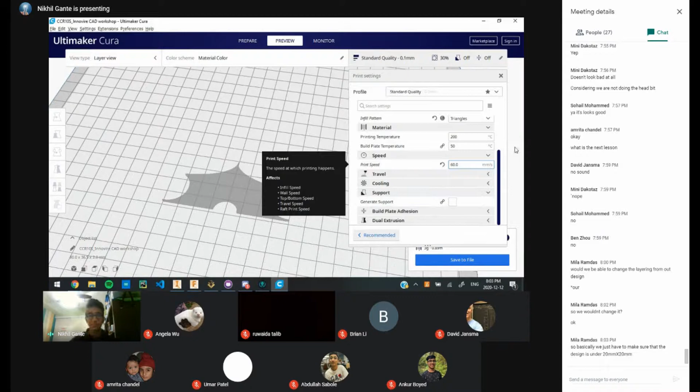Also Nikhil, if you just want to hit slice, it'll slice that and show the layers. Yeah, I'll explain all these settings later. Basically, print speed, fairly intuitive, it's 60 millimeters per second. Oh, it's frozen on me. So this entire part is 3 grams, and it'll take 33 minutes to print. It's a really small part, guys, it's 80 by 40 millimeters.

So I'm going to press play, and it'll show me exactly what the profile is going to print. This is, I'm pretty sure this is real time, but I'm just going to speed this up. And if I speed this up like so, what you can see is it's actually going back and forth like that to fill up the space.

So I hope I didn't bore you out of 3D printing or anything. It is a really exciting process. I'm sure I'd be much more passionate if I were teaching you guys how to make a part that I actually used, or with a software that I actually use. But that's pretty much the entire process.

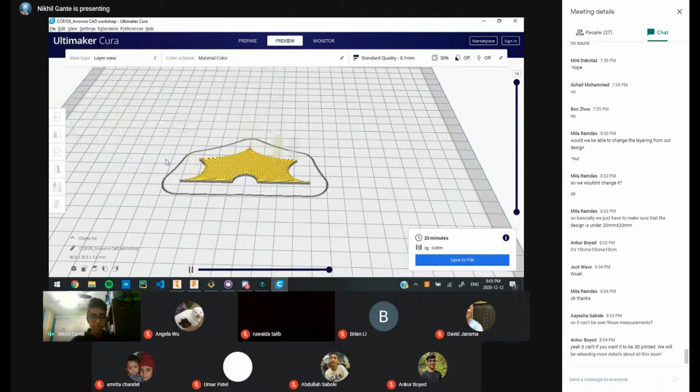So I can click save to file, and I have G-code that I can send to Ankur's printer if need be. I'm gonna hit cancel, I don't actually need this file, but I'll post the link to my TinkerCAD in the chat. Share over. Oh, can I not share a link? Okay, that's not ideal.

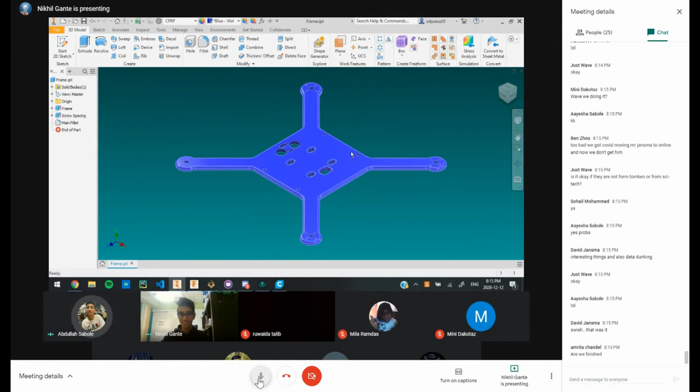We will send out emails tonight with the submission link as well as all the other details of the competition. You guys will have until Thursday at midnight to submit your designs, and then we will put up all the designs for voting, and you guys can pick which design you like the best. The winner will get a $25 gift card of their choice, along with their design printed for free.

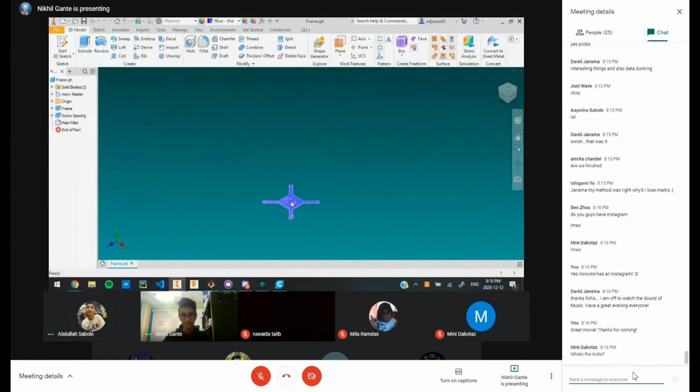That quadcopter I was showing before, if you look at my screen right now, this is what the final product was. Ankur graciously printed this out for me. It's pretty much a combination of everything we teach in our classes. There is an Arduino Mega controlling stuff. The frame is 3D printed, which I teach in my CAD class. And there's a bunch of electronics as well, so software, hardware, all the good stuff. If you guys would be interested in joining our classes, that's some of the stuff we'd be working on.

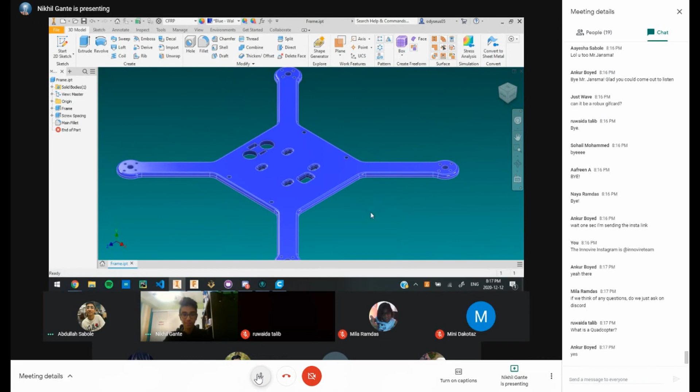A quadcopter is a drone with 4 motors, that's where the quad comes from. I know it looks like a literal bomb, but it's not. It's just a bunch of wires that are poorly organized that makes it look like that.

There's 4 motors right over here, and when you give power to each of them... oh, someone just subscribed to me, it's been like months. Well, thank you, I really appreciate it. Guys, Coding Boy 56, please subscribe.